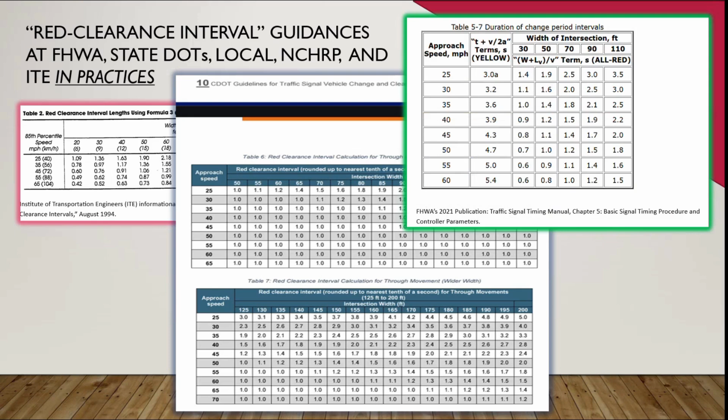I don't know, for some reason Oregon DOT's guidance just reversed from the others. I was talking to my manager about that - he said Oregon is partially restrictive on red clearance. So I still get no direct answer why it goes reverse of the other order, when your speed increases you should have decreasing clearance. So it's one of the issues.

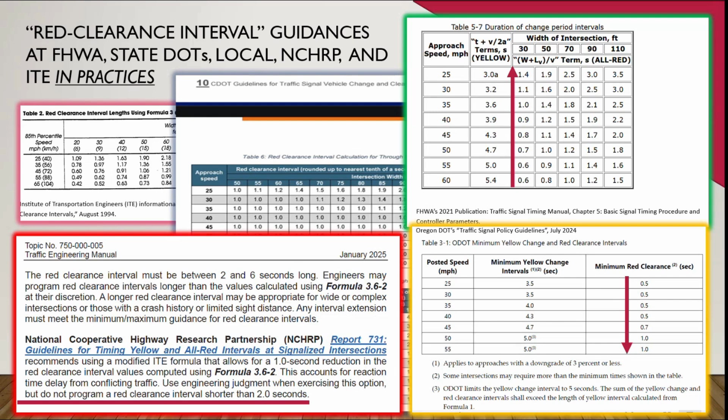Also, I want to look at the research field - it has a big research field about signalization. When people look at traffic safety study, there's a shortcoming: they have to look at a few years, especially when you put in a new signal timing, they don't know the result right away. Maybe they do a 3-year evaluation, before and after, and 3 years later they find out.

No? Oh, okay, I thought you had a question. So, before-after study is very costly, very time consuming, but it's also a reactive approach. What's a proactive approach? I think modeling can take a proactive approach. That's probably why my boss was asking that question.

You know, Snoqualmie Ridge is a... you can, if you have time, visit. Snoqualmie Falls is beautiful, close to Ben Stabler's house, right? You used to live there. Okay.

So I only pick up the recent ones. The 2020 ITE released guidance specifically about traffic signal timing for the change interval. They have a specific, improved guidance. Unfortunately, it doesn't cover pedestrians, so the safety benefits of the yellow change for pedestrians are not determined. Traffic signal timing change and clearance still need research, even after 60, 70 years.

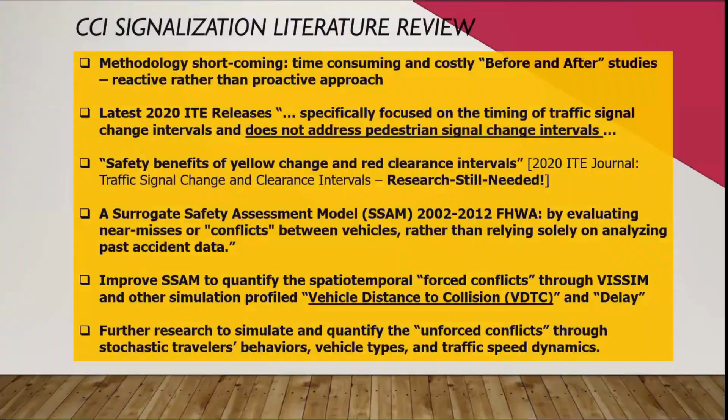I want to look at the real case using a very simple case with scenarios. Look at the 5 different scenarios I can think of; in the real world there are probably more. The first one is no red clearance for vehicles and pedestrians. Second, you give clearance for pedestrians but not vehicles. And so forth, including the last one, the leading pedestrian interval. These are the 5 types I can think of.

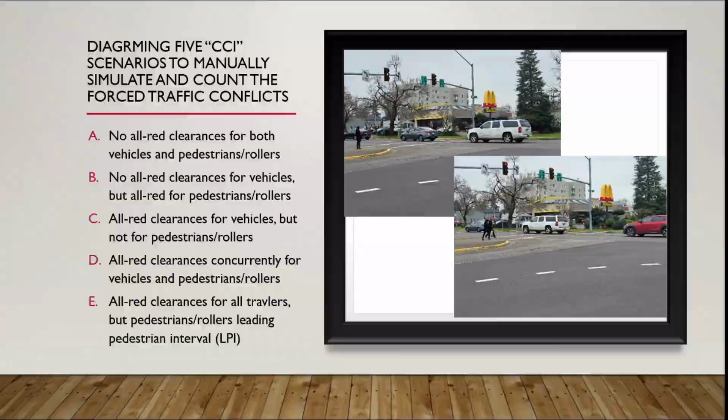So I want to go to the very basic simulation about the 1 second red, because we all know simulation is like a cartoon, picture by picture. If I remember right, VISSIM uses 0.1 seconds for every picture in the animation. For my purpose, I can only show quarter seconds. People are in the intersection trying to clear. If you don't give red clearance, the other approaches start to move. There could be vehicles, pedestrians or rollers. I identify rollers 1, 2, 3 and pedestrians crossing the intersection. I used a preliminary engineering paper to draw them to scale, the speed, the time, to show the conflicts of different situations at that 1 second red.

So I go by 3 seconds, because those 3 seconds from yellow to red, then to green or staying red, are really critical for conflicts happening. I'm just focusing on that conflict situation. The first picture is the same for all the scenarios. In the second one they all move at different times. Here you can identify there are 6 pairs of forced conflicts: vehicle to vehicle, vehicle to pedestrian, vehicle to rollers, because there is no clearance for anybody. Assuming everybody is following the regular rules, but of course in the real situation people could stop and wait.

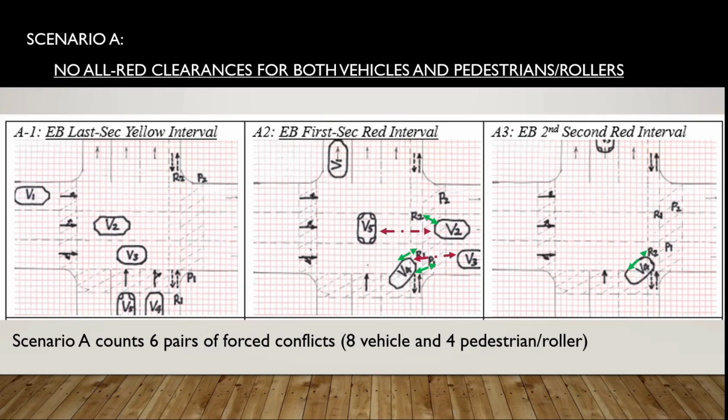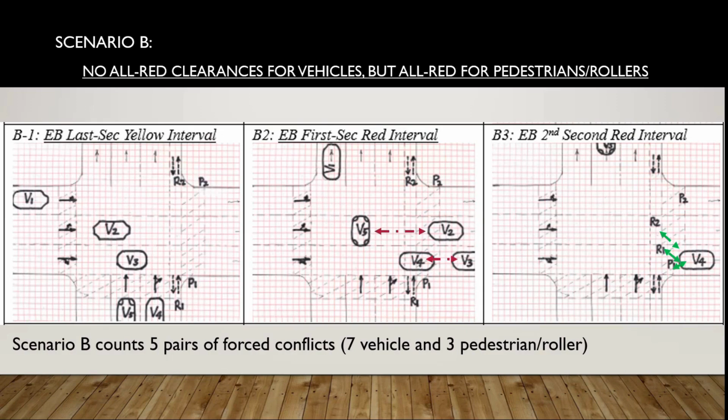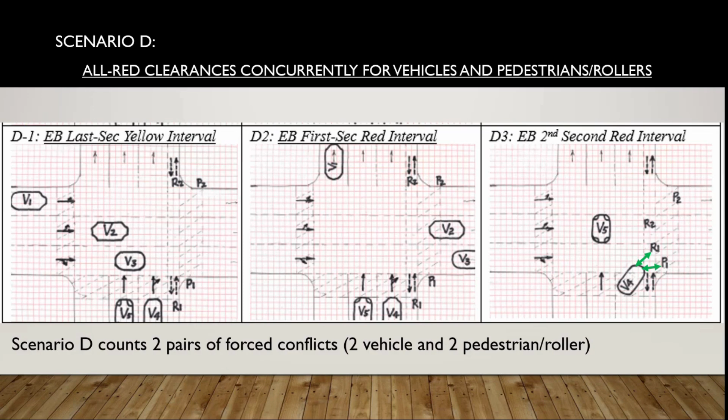However, if you go D, you give pedestrians, vehicles, or rollers all 1 second red clearance. You reduce the conflicts quite a bit. You reduce to 2 pairs of forced conflict, like only 2 vehicle and 2 pedestrian. That's only because of the right turn vehicles. At least you clear the intersection for the vehicles, with pedestrians running at the same time at the intersection.

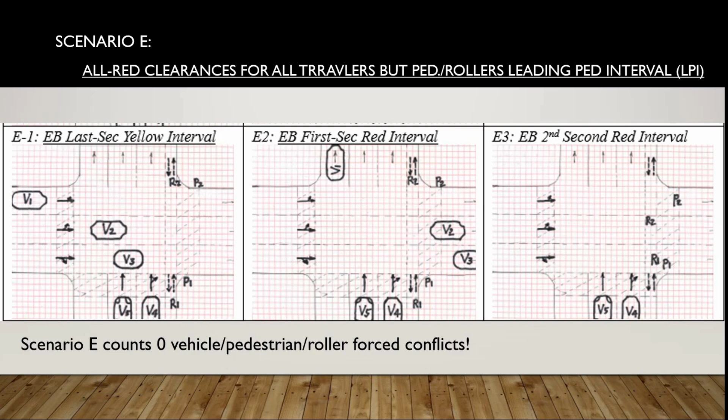There's another one, scenario E. You give them all 1 second clearance interval, but you want the pedestrian to have a leading pedestrian interval. You actually give a little bit more than vehicles. I see some locations give 2, 3, or even 4 seconds, depending on how many pedestrians are moving. So in that case, I cannot find any conflicts because that clears the way, right? Clear the way, there's less conflicts. So I'm trying to see if less conflicts is less accidents.

So what I did, I live in the Northwest, as I said, I surveyed 50 to 100 intersections in Oregon, Washington, Vancouver, BC. I just wanted to see how they do. I was very personally curious. This is what I found in Oregon, I picked randomly, really random. I'm not purposefully trying to track somebody. I know Portland has a lot following the same D. Portland is mostly following the standard. No matter how many you give, it's all the same way.

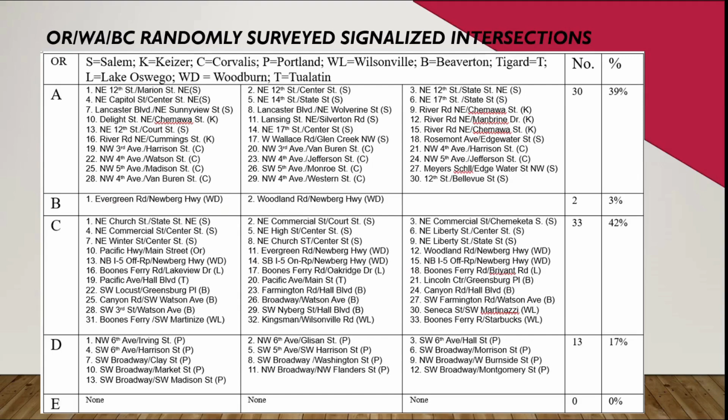I actually go to visit Portland a lot, but I found other locations that vary significantly. It has a high percentage on A, B, and C. B is less, though. Then I looked at Washington, sorry, I got mixed up because I lived in Washington 20 years. And I saw Washington was doing mostly D and E, especially if you look at downtown. There are some Bs outside, like Aurora, because they're outside of downtown, with speeds of 55 miles an hour. So at side streets, they do give some B level.

So I looked at Vancouver, BC, Victoria, some of the other cities when I traveled there. It's purely random, I picked those intersections. They have a lot of D and E level. So as I said, I showed scenarios A through E through conflict reduction, number of conflict reductions, right? So I just give a summary of that. You'll find that Oregon has a high percentage on A, B, and C. Only Portland City doesn't follow Oregon DOT's rule. They're just using their own standards.

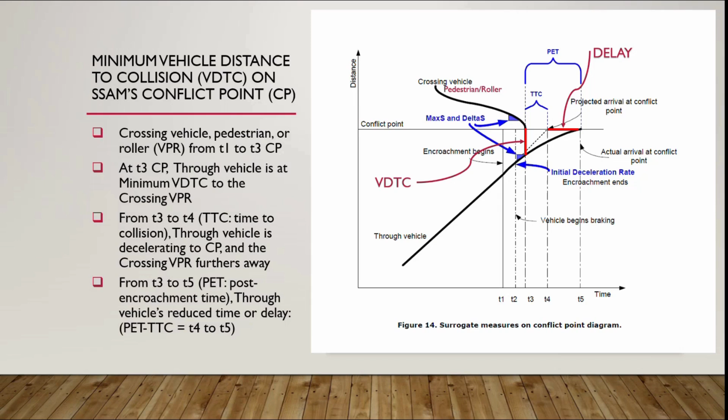So on the other hand, the delay was a safety guard if you don't have that delay. But you want to evaluate both the distance to collision and also the delay. If you get too much delay, you lose the efficiency of the vehicle operation, right? So what I'm saying is you want to quantify them reasonably.

First of all, you've got to define unforced and forced traffic conflicts, because in this research field about safety, one research says 94% is the victims who cause the issue. They either get drunk, they drive carelessly or something, but for the other 6% they still don't know the reason. So we have to look at whether that is a forced conflict.

If you play tennis, you get a forced error, an unforced error, right? So these things happen in the real traffic world. Same thing, you have a forced error, which could be a forced conflict, could be a bad system. You have unforced, could be drunk driving or aging or perception time, all the other issues. So I think it's good to redefine them, adding that spatial temporal profile.

Because we know the simulation already provides every vehicle, every moving object, the profile, the outcome in time-space, we can easily measure the vehicle distance to the conflict, I mean, the minimum distance to collision. You can calculate for every pair of vehicles, or moving objects, how they are distance-wise. Take the minimum, then you count them. I mean, you let the computer count them.

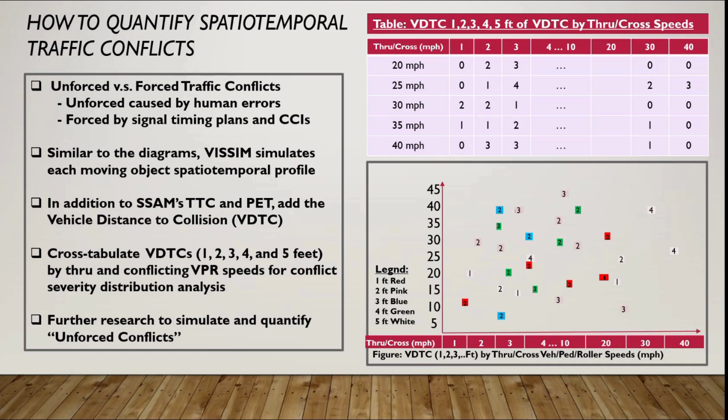So another one I want to say is further research to simulate and quantify unforced conflicts. I want to go to the next page to tell what I actually went through, quite a few research papers. I said maybe I should put a summary. What's important? There's vehicle types, because right now you have heavy vehicle and bus percentages. You have EV penetration, like somebody was discussing. Then the vehicle size effects, all this when you do the simulation. Right now, I don't know how the Vissim has been considering them.

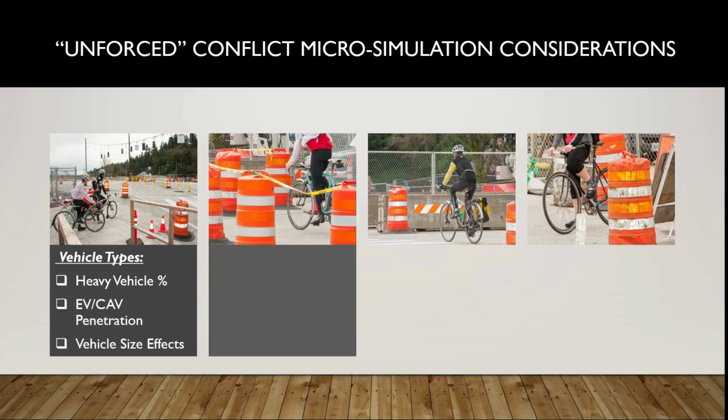I saw some using the acceleration or aggressive driver, those things. That's the speed dynamics, like speed ranges. When you do a simulation, not everybody follows the same speed. Even though you say it's 25, people could be 20 or 25 or 35. That's why the conflict could vary if you have vehicle driving speed differences, right? So acceleration and deceleration could be different, depending on how people see that conflict potential. Some people try to accelerate to pass the guy. That's why accidents happen, right?

And then there's left turn versus through. There's new research about why the red clearance should be given differently for left turns, because left turns usually go at slower speed. Another suggestion is travelers' behavior, like people driving aggressively or not aggressively. Age group: in Oregon in particular, a lot of different communities have a higher percentage of aged people. And then also perception reaction time.

Something people have to remember: kids' reaction time is a lot faster. I read a paper, especially at those intersections, the kids run faster because they see it fast, maybe in a split second, while we may see it's yellow in 1 second. Depending on aging, it's very important to take those into consideration. Running yellow, usually about 10% are running red, sorry. But a lot of states allow that, right? 39 states are permissive, and 10 states are partially restrictive. One state, I forgot, is Virginia. They're very restrictive. You cannot run red lights no matter what. They give you tickets for that.